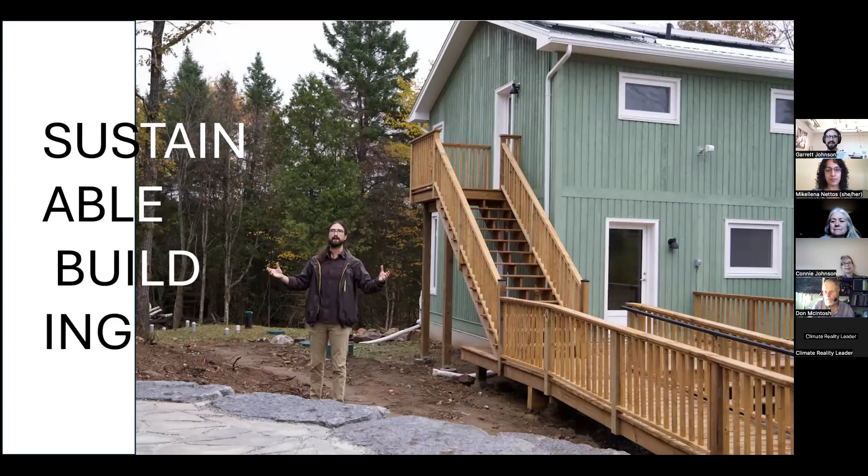So as a preamble, I'd like to just acknowledge that there are many issues in the building sector, and I'm going to talk about technologies and approaches that are needed to offset a lot of the negative effects of the built environment. But I was reminded recently after speaking at an event hosted by Plenty Canada and the Niagara Escarpment Biosphere Network that no amount of technology is going to fix the issue of environmental devastation that we're seeing, and probably more important will be to change our relationship to the land and to one another. And any technological solution will inevitably be a stopgap until the broader issues are healed. We can't design the Line. I don't know if anybody's seen that, but these mega projects claiming sustainability aren't the answer.

And I'd like to quote Dan Longboat, who spoke at that event I referenced before, who said that hurt people, and we've hurt ourselves and hurt the land, but in the process of healing the land, we can also attempt to heal ourselves. So that's just context for the rest of the presentation.

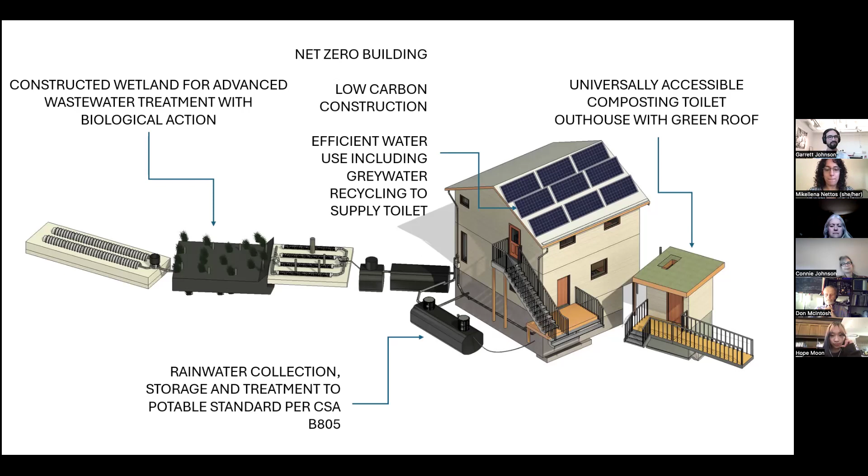So I'll start off with the rainwater harvesting system. You can see this is a below ground tank, 5,600 liters. And again, it supplies the whole building. So potable use, toilets, everything. And there's actually a standard now that allows you to have potable use officially, called the CSA B805. So if you're interested in doing this in your own projects, you can look that up or get your local builder or engineer to cite that standard, and building officials will take it a little bit more seriously.

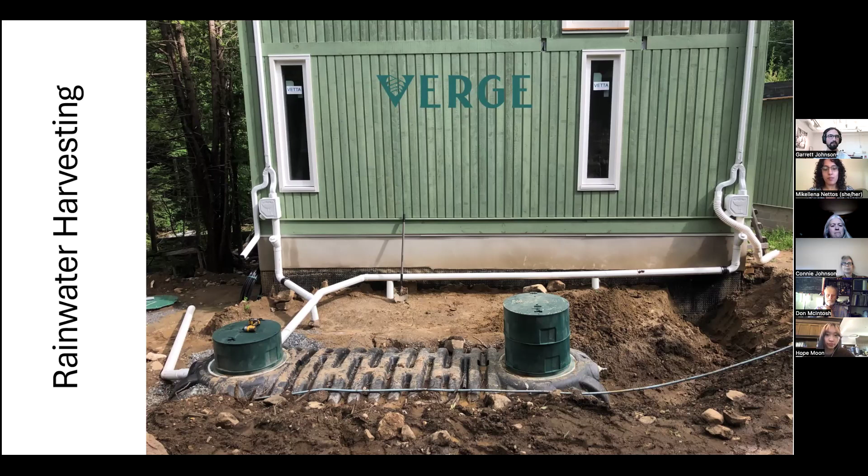I learned a lot about rainwater harvesting from Verge Permaculture. I highly recommend their rainwater harvesting course. These systems are great, not just for off-grid systems, but also in urban environments. They affect stormwater management on big systems, similar to how your single home solar panels can affect the larger energy grid. So there's a lag when stormwater reaches the sewers, and it helps out with municipal infrastructure.

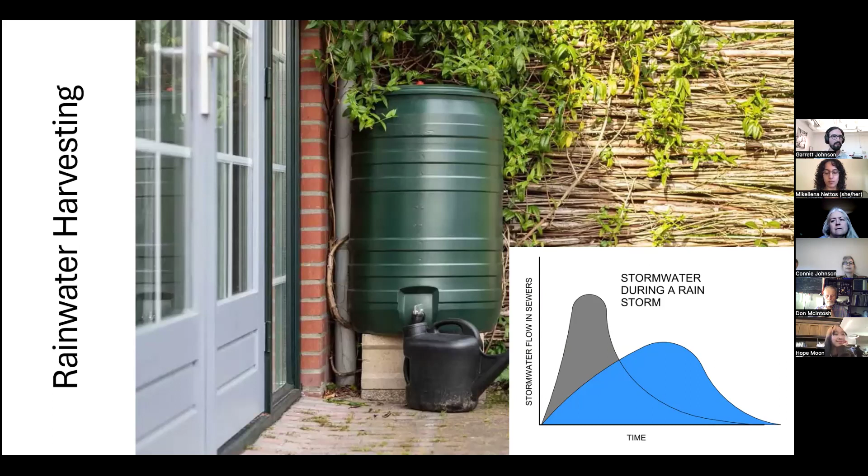And this is the gray water recycling unit we installed there. So it takes water from the showers, treats it, and then sends it to the toilets. And that can reduce your average home use by 30% and up to 90% for commercial buildings.

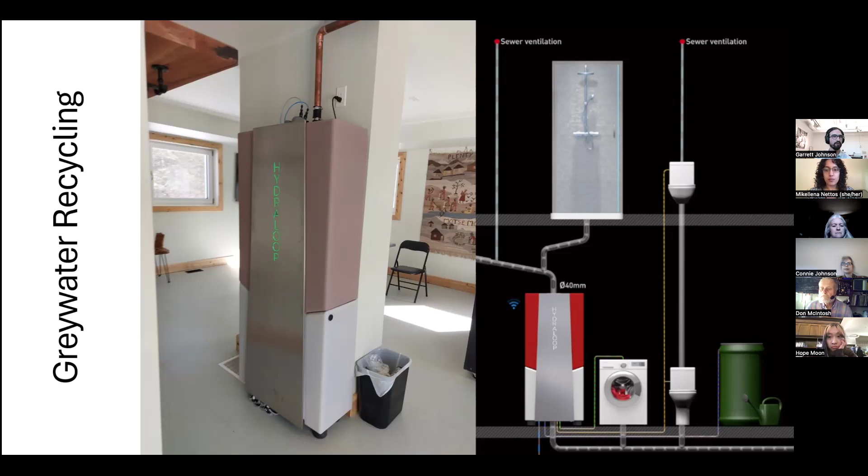And this, again, is a snapshot of that advanced wastewater treatment with the constructed wetlands. So water filters through sand and rock media where plants are rooted, and those biological activities take nutrients out of the water so they don't end up in groundwater. And I designed this system with Rivercourt Engineering.

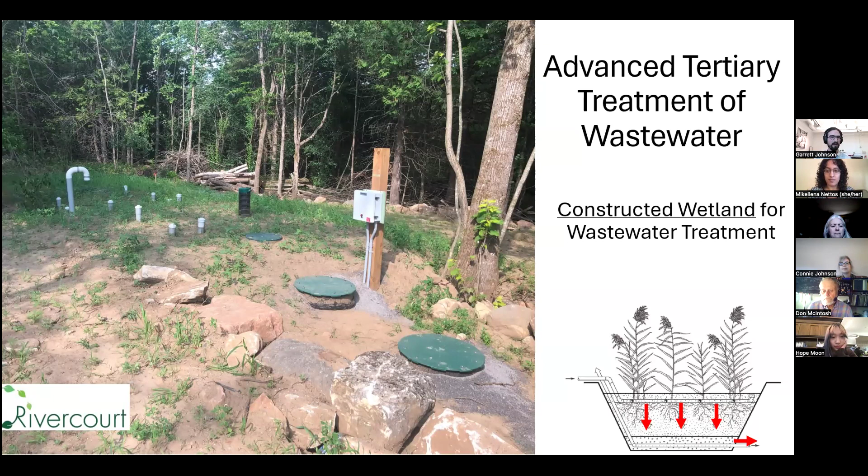And finally, we have the true and direct circularity. So this is a composting outhouse, very much inspired by the Humanure Handbook, which I highly recommend. It's a very great book. And this system is great because it's inexpensive and simple. A lot of the other systems, like the gray water recycling system, and even to some degree the constructed wetland, they're expensive, kind of complex, and sometimes they're more suited toward commercial and institutional situations. But you can also take that smaller approach and do something good on an affordable scale.

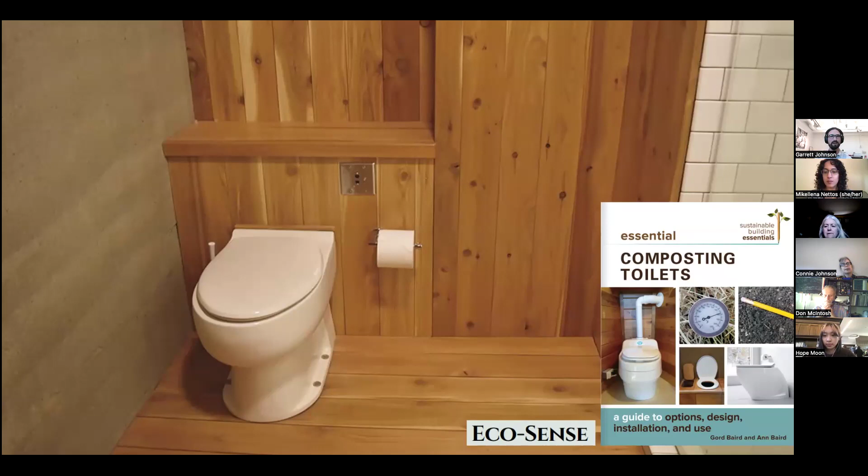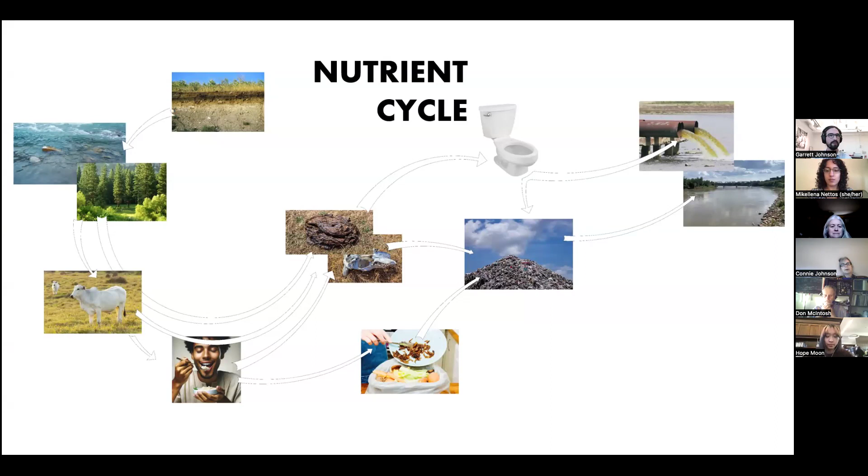And you can make it look nice inside. It doesn't necessarily have to be an outhouse. There's a lot of people that have these in their homes, and it doesn't have to look bad. And that helps out with the nutrient cycle. So it takes us from a situation where we're taking nutrients from the soil and essentially just dumping them into the water to something that's more of a natural cycle where we're taking nutrients from the soil, using them, and then putting them back into the soil.

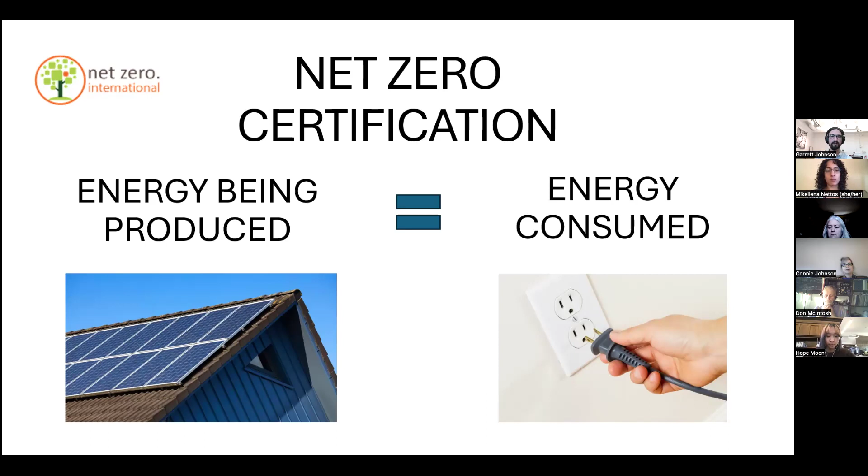The building at Plenty Canada was also net zero certified. So that means that the energy being produced on site equals the energy being consumed. And this past year, the building was actually producing more energy than it was consuming. And that's largely due to the insulation that was added and the windows. So we stripped off some very old siding that was kind of falling apart, added some low carbon wood fiber insulation outboard, and replaced all of the windows with triple pane windows.

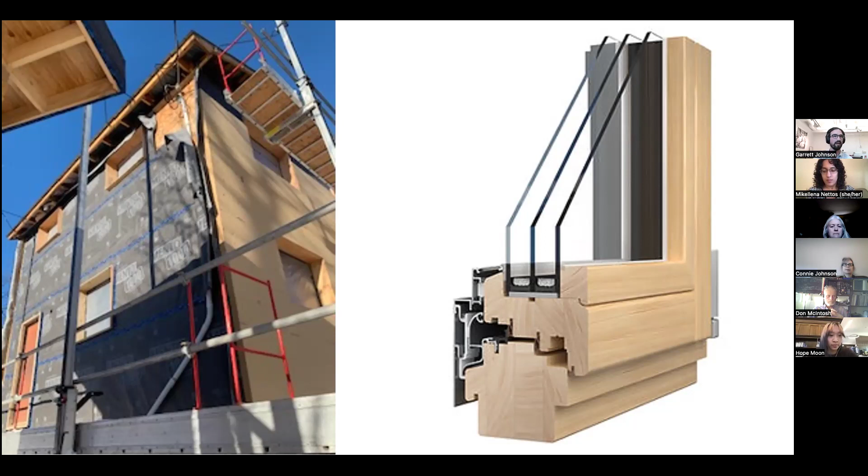And this is more of what I'm going to talk about for the rest of the presentation. My background is mainly in building construction, and a lot of the work that I've been doing recently has been around insulation and embodied carbon in the built environment, which I'll speak about shortly. So as everybody knows, there's a housing shortage in Canada, and people are talking about building homes more quickly. You know, the More Homes Built Faster plan in Ontario.

And this obviously has to be paired with building efficient houses. Most of Ontario is heated with natural gas, and the typical home ends up releasing about 4.5 tons of CO2 per household per year. So it's obviously very important to have that building envelope, the insulation around your building, be very efficient to reduce that number.

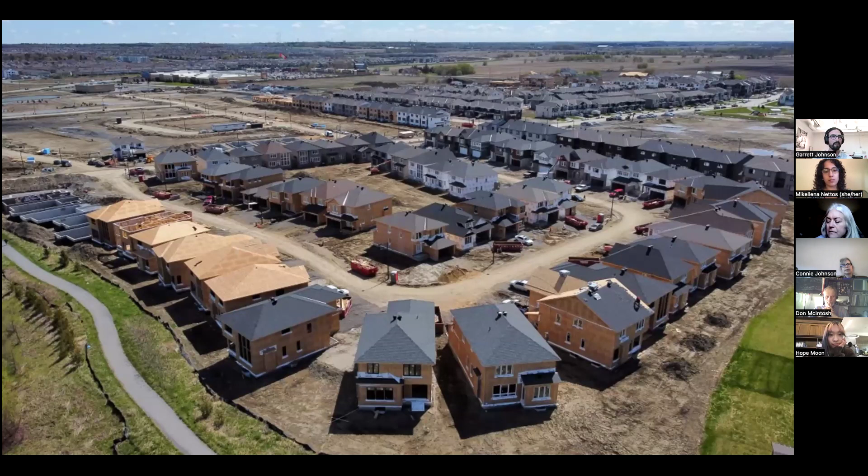But there's a similar situation with the impact of building homes. The materials that go into the house itself also have an impact, and the manufacturing processes, the raw materials extraction, all of that ends up having an impact on the environment. And that's what we call embodied carbon. So from raw material extraction, transportation, installation, demolition, end of life, that's all embodied carbon.

Whereas operational carbon is what the majority of the sustainable building industry has been focused on up until fairly recently. And that's just making sure you're not burning a lot of natural gas to heat your house. But it turns out that embodied carbon can actually have a huge effect on the overall environmental sustainability of your construction projects. And it can even outweigh that operational carbon.

And there was an embarrassing discovery recently where people started to realize that the well-meaning sustainable builders and people who commission them to build their houses can sometimes end up doing more harm than if they had just built a regular house, by trying to add all of that insulation to hit those really low operational carbon targets. Adding things like spray foam, particularly the pink hard rigid foam, XPS insulation, has a very high global warming impact. And you can actually end up doing more harm than if you had just built a regular house and even heated it with natural gas.

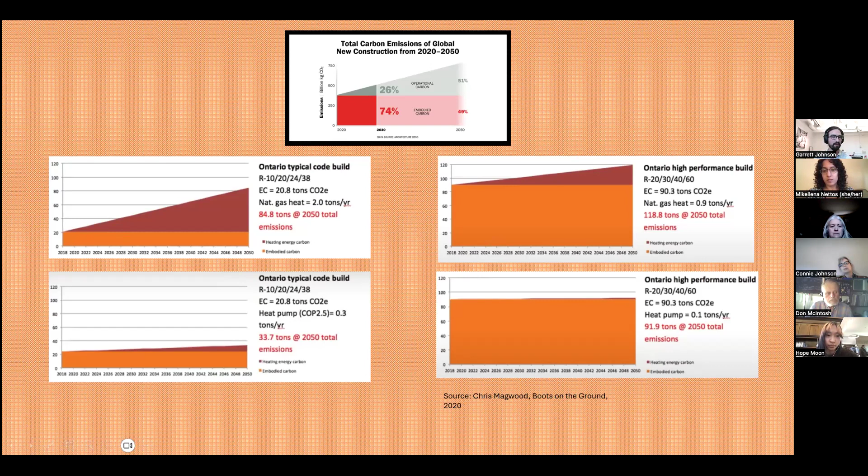Very surprising. But the good news is that it's possible to use different materials and still get a very efficient house, but have a very low embodied carbon. And this chart is from Chris Magwood's talk from Boots on the Ground in 2020, and he shows that even heating with natural gas, it's possible to have a very low carbon impact. And if you heat your house with a heat pump, have an efficient home, use those good materials, you can have a negative embodied carbon profile for the lifespan of your building.

So that means you're sequestering more carbon by building. You're actually doing something good for the environment. And that happens because plants are natural sequesterers of carbon, especially fast-growing plants like agricultural fibers. There's a lot of talk about carbon sequestration, building machines that are solar powered to capture carbon direct from the air. Plants are already doing this, and they're creating a material as they grow that we can use and incorporate into our environments. So taking those natural materials, processing them with renewable energy, you can actually have those negative embodied carbon profiles for the materials that you're putting into your building.

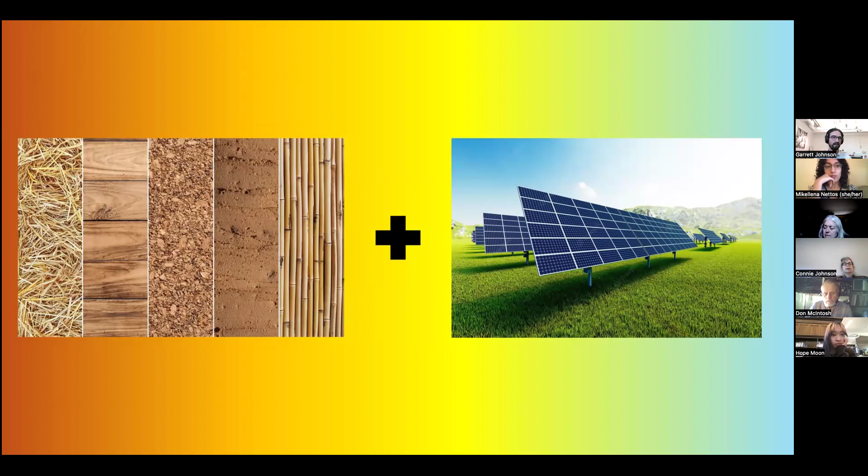You put them into your building and they stay there for as long as that building is standing. So it can stay for 100 years easily if you build right and take care of your place. And that's important because CO2 emissions have sort of a lag effect when they're emitted. Even if we stop emitting carbon now, we have all of these issues with the carbon that is already in the environment that's going to cause warming.

And to truly limit the effects of climate change, we need to not only hit net zero, but net negative carbon. So we need to be sequestering more carbon than we're producing as an entire society. And this could be a very useful, easy way to do that in the short term, to take carbon from the atmosphere and put it into our buildings.

And so I'm going to talk specifically about one aspect of a home's construction, that continuous insulation. So for those who don't know, it's now a requirement in most situations to have this layer of usually foam outside of your house's framing. And this is good for building efficiency. Continuous insulation doesn't have any thermal bridging.

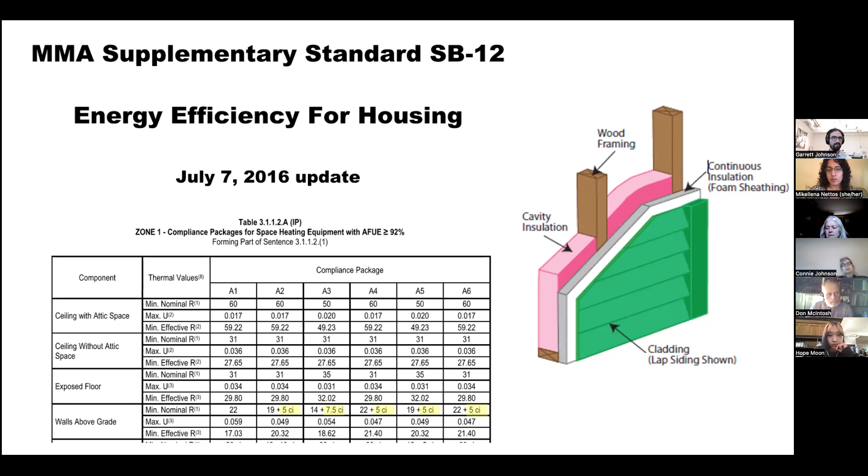And installing this in your home, you essentially can't install enough to justify the savings in energy that you get by having a more efficient house. So you have to choose your materials wisely. And these are the most common rigid insulations currently used today. Those are the big five.

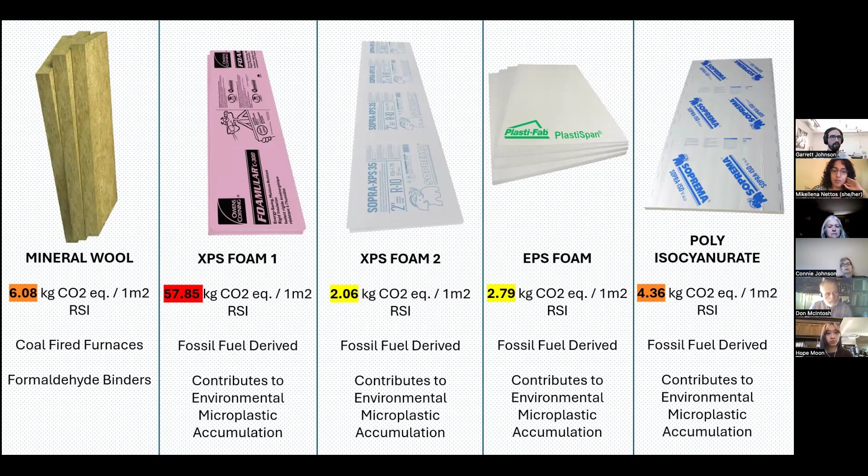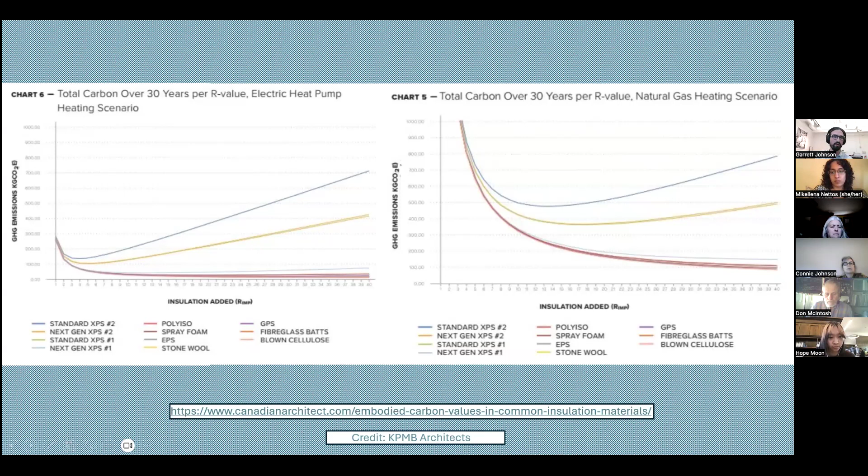And for different materials, they act differently. So the better materials, you see those emissions reducing the more R value you add to your house. So it's important to choose your materials in your building. And there are some existing products that are available, and right now they're pretty much exclusively made from wood fiber. So there's a company called Gutex from Europe, Sonoclimat from Quebec, and a new company, Timber HP, that's operating out of the United States.

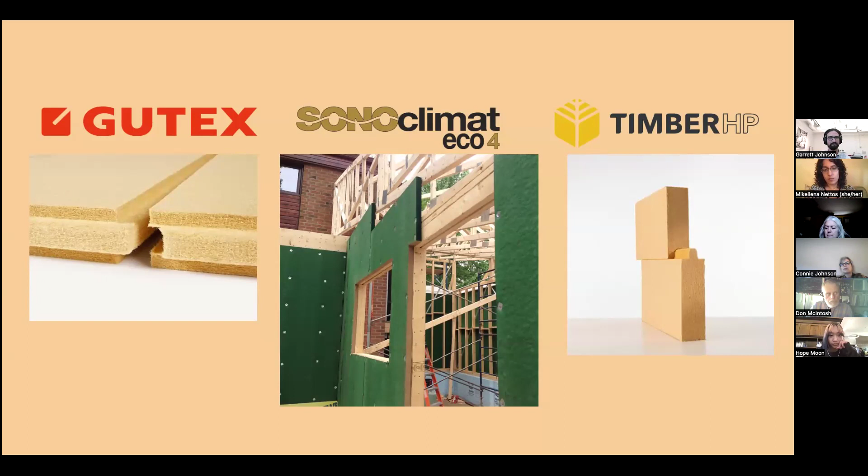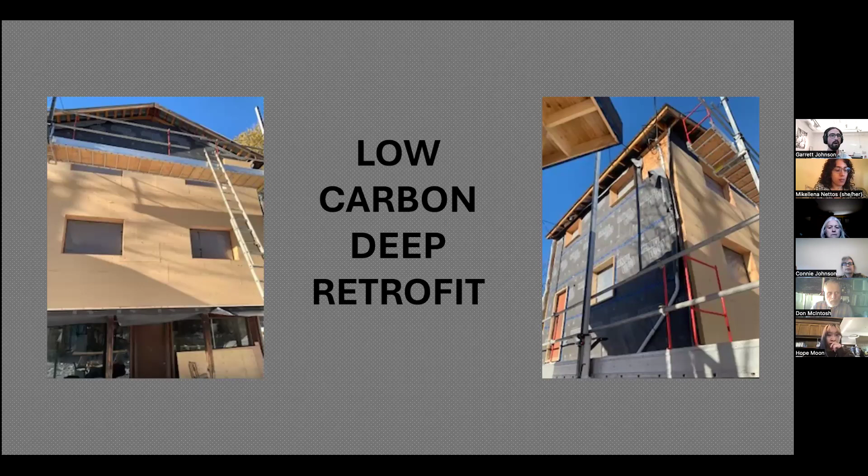And that's how we insulated the building at Plenty Canada. So we did a low carbon deep retrofit. So for people considering retrofitting their building to be more efficient, choose those materials. They're available. They're not significantly more expensive than the other products, and they'll actually do a positive thing for the environment. And that's how we can have a renovation that ends up being carbon negative. So that building is heated with a heat pump and has those natural carbon sequestering materials.

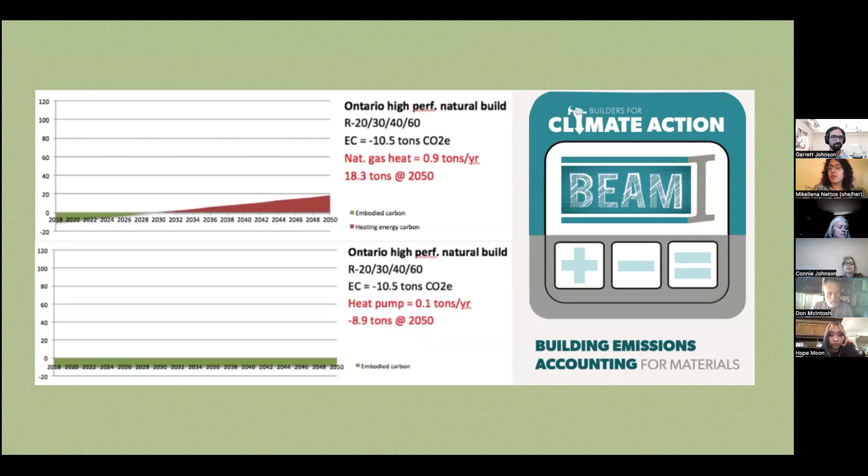But not to demonize forestry, but there are issues with the lumber industry, and a poorly managed forest is not necessarily carbon sequestering, and it can do harm to the environment. So there's deforestation, habitat loss, carbon emissions from decaying roots and the brush that they clear and leave on the land. And then there's all of the transportation emissions and infrastructure that goes in from taking the wood from these forests that are further and further away as we harvest all of the forest habitat nearby population centers.

Transportation increases all the time, and we're increasing the use of wood that we're needing with things like mass timber, which is great. It's a great alternative to concrete and things like that for industrial buildings, institutional buildings, commercial buildings. But there are maybe better choices and better paths to go down for smaller scale situations.

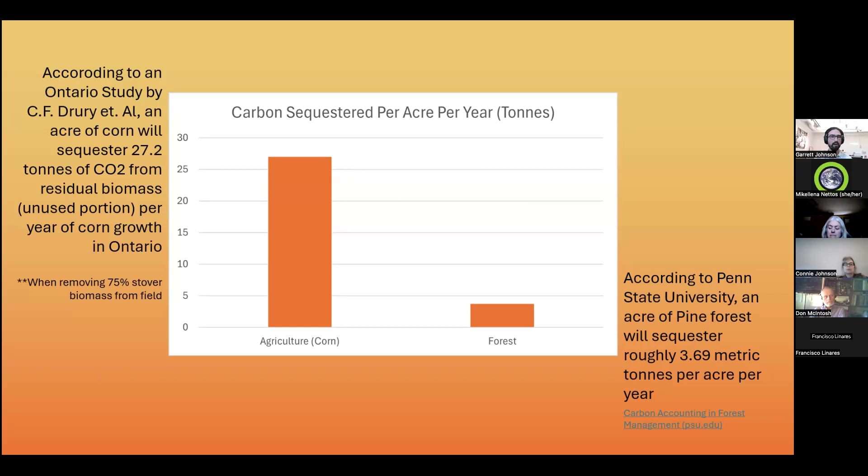And there are methods already existing that use this concept. So straw bale construction, it's been around for over 100 years and is seeing a revival recently. You can make very modern, beautiful looking homes that you would never guess were made from straw bales.

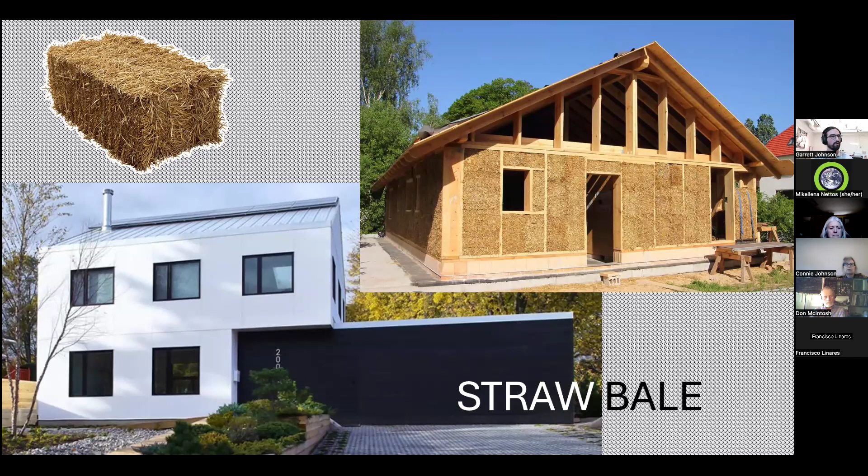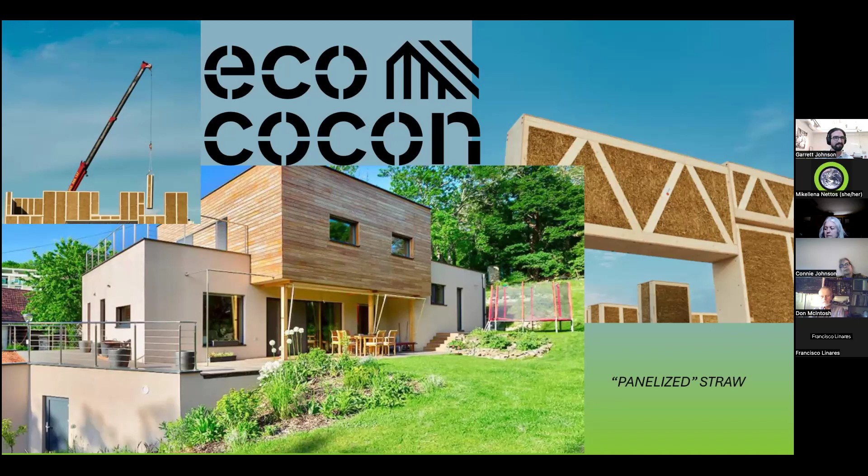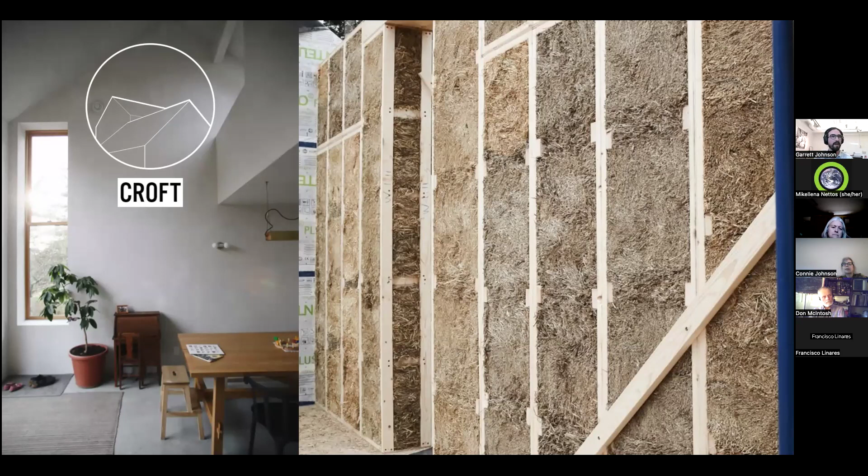And there's even a growing community of builders making prefabricated straw bale wall assemblies. So Ecococon from Europe is one of the big players in that field right now, as well as Croft from the United States. So they essentially pack straw bales or straw from agricultural waste products, and they pack it into your wall, and that acts as insulation. They can prefabricate it offsite and then ship it over and drop it in with a crane.

There's also hempcrete construction or hemp lime construction, which was recently added as an appendix in the International Residential Code. So for this building method, you take hemp hurd, the inner hard core of the hemp plant, after you've stripped away the fibers on the outside, and you mix it with lime, and then you create this sticky mixture and you pack it into forms, and you can layer it up and get these kind of beautiful striations there, or you can turn it into bricks and ship it to site and build up like that.

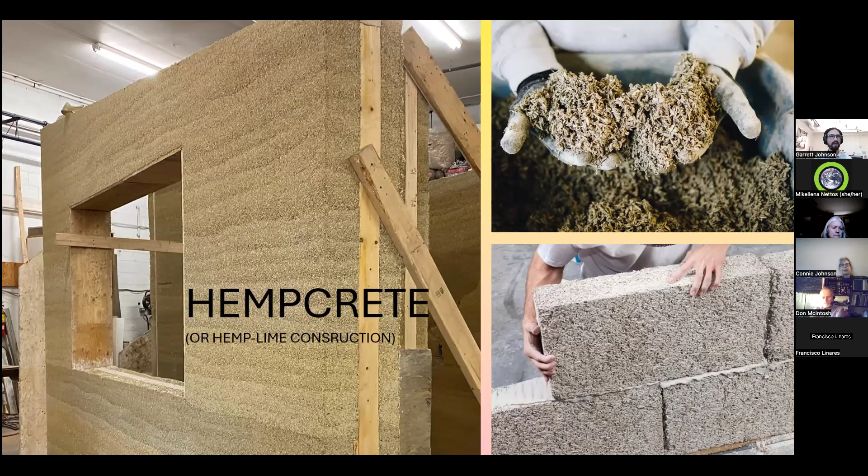And again, you can make any design that you'd like with this. They don't need to be limited to something that looks like it was home built, or anything like that. They can end up becoming mainstream. They can become normalized.

And beyond those other building techniques, which I think might often end up staying as niche systems, because the building industry is made up of workers and people who have skills and training, and you have to learn new skills and develop new knowledge to implement some of those other techniques. And again, those are great and they're necessary, but we can also take products that we know how to use already, like fluffy batt insulation, like that pink fiberglass you see in your walls, and we can substitute it with natural materials.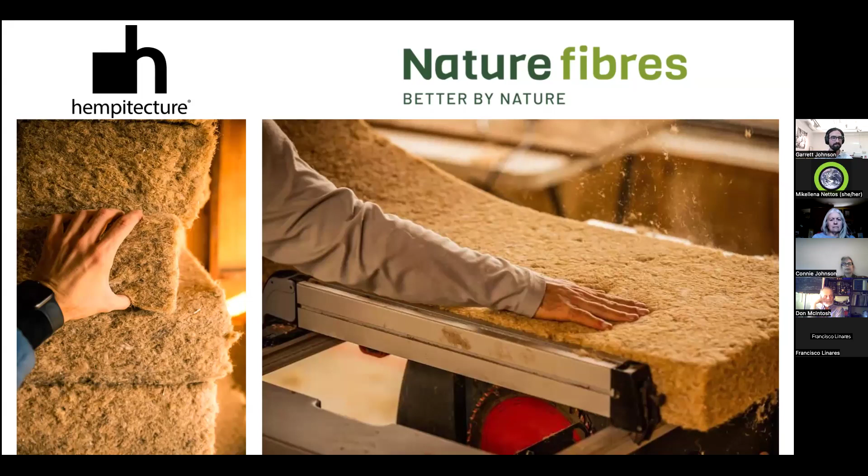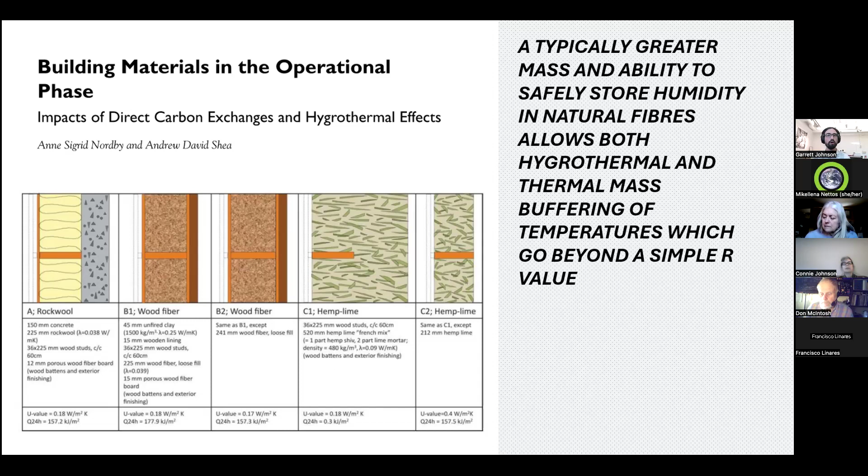And another benefit beyond carbon sequestration for natural materials being used as insulation is that they typically have a greater mass and ability to safely store humidity in those fibers, which has a benefit that goes beyond the typical simple R value of a wall. And that's because with the heavier mass, the materials in the wall itself have to heat up before it radiates heat inside and heats your building. And it has to cool down before that coldness is felt inside your building.

So the greater the thermal mass and specific heat capacity of a material, the longer it will take to heat up and cool down, and therefore the longer it'll take for you to notice those outdoor changes. That means more stable temperatures inside your house, which is great for shoulder seasons like the spring and fall, where there's a swing throughout the day and night cycle between heating and cooling.

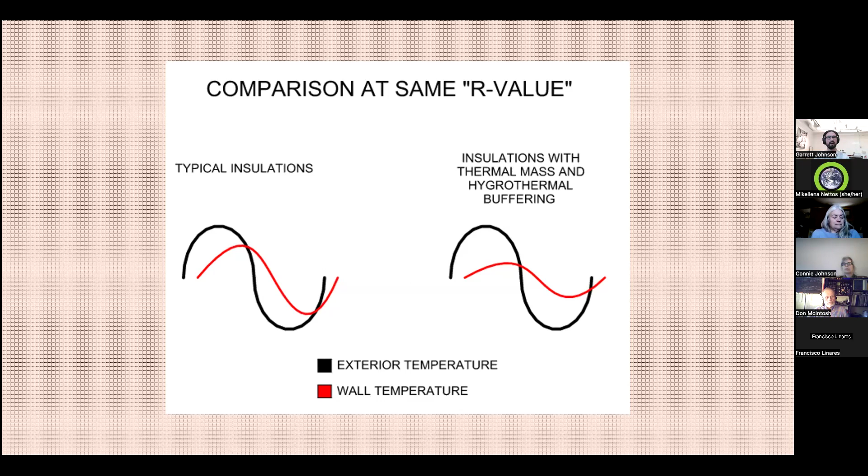And the humidity absorption acts in a similar way. So if there's humidity within a material and it starts to heat up, it takes some of that energy to change the water's phase from a liquid to a gas. And that change happens without an increase in the material's temperature. So it kind of acts in that same way to stabilize temperatures.

But where is the non-toxic, carbon negative, rigid insulation from agricultural fiber? So we saw that hemp batt insulation, but there's not really an equivalent for rigid insulation to replace those foams that can be very harmful. And that's where my recent work has been focused.

So in a project that I took on while I was in school at Mohawk College with IdeaWorks, I was sponsored by Evolve Builders Group, which is the company I work for right now, and the Canadian Bio Clean Tech Applied Research Network, CBARN. They supplied some funding and lab space for me to play around with fibers and adhesives.

And originally I was very focused on hemp fiber because that insulation already exists, and it was kind of the natural inspiration. But after a conversation with Chris Magwood, who I hired as a consultant for the project, he talked about how hemp is not really grown in Ontario at the moment.

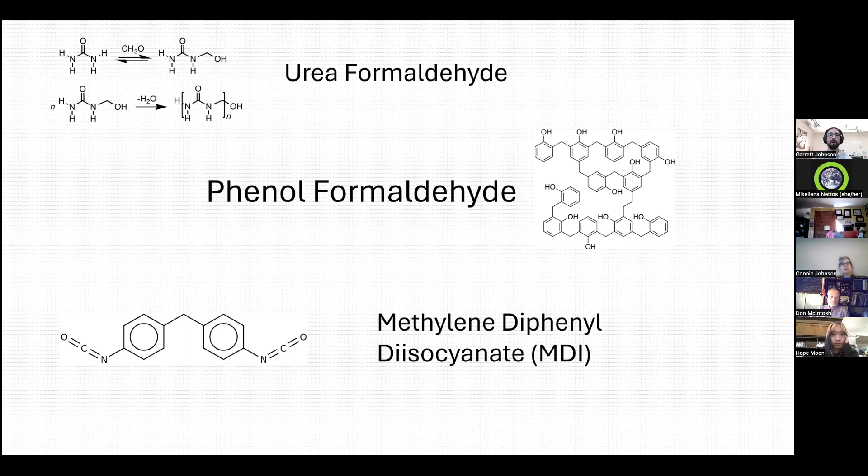So the fibers were sorted out, but in the construction industry, we use a lot of really nasty adhesives. And these are the big ones that are used in pretty much every engineered building product, from plywood, particle board, insulation, like fiberglass insulation or the rock wool insulation. They're using formaldehyde adhesives with petrochemical origins, and they're toxic, or at least the base constituents are. And I really wanted to avoid these materials going into what I was developing. So that was a big part of the project.

I did a lot of research, hundreds of experiments trying to create an adhesive from lignin, which is the glue that holds together plant cells. So as I said before, in every plant, there's lignin and cellulose, and they work together to create a plant. And you can extract that glue and turn it back into something that's like glue. And eventually I hit a successful formulation, waterproof, non-toxic, and bio-based. And this was the resulting sample.

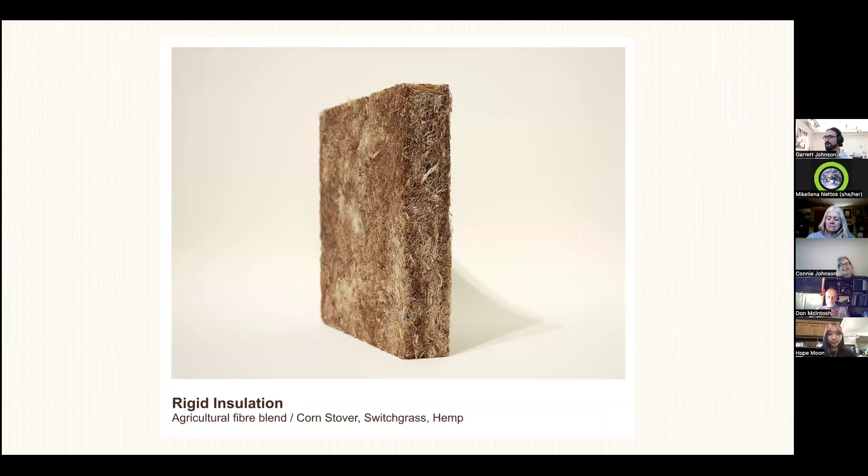And we were also interested in creating something to replace OSB, inspired by this company called Plantd, which is creating OSB from elephant grass. So that's another perennial plant. And this company has recently been awarded design competition awards, and they're getting a lot of investment to produce their materials, which is amazing. Unfortunately, it's not available in Canada, and I don't think it's even available countrywide in the States. So we were trying to come up with a similar solution here.

And we produced some samples. So OSB samples from hemp hurd, that hard inner core. It's very similar to wood and those chips of wood that make up particle board and OSB, the oriented strand board, wafer board that a lot of houses use outside of the studs.

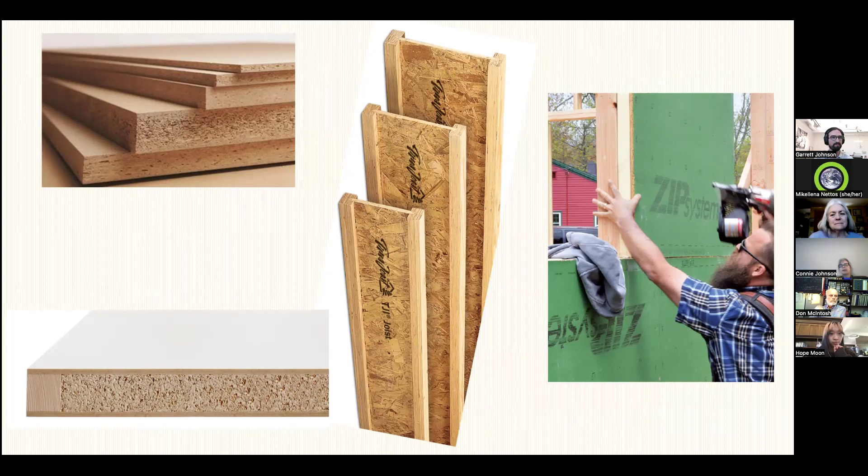And I suppose Janet asked me to put out an ask to the community. So if there are any IP lawyers in the audience that want to help navigate patent processes, we're in that process right now, or grant writers who know about non-dilutive funding, or people who just want to get involved in

the green building. I encourage you to build with your local sustainable builder, seek those alternative materials, think about your consumption, think about where your materials come from and where they go after you use them. And you can get involved in the industry. Look up videos of straw bale, hempcrete. You can change your career path if you're ever thinking about it. I did it later in life, and I'm very happy that I did.

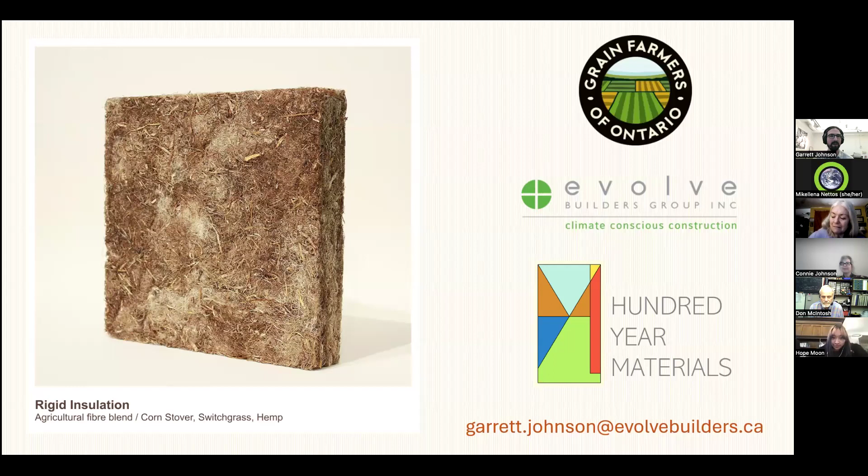That's super exciting. First of all, congratulations. Thank you. But is the idea that you would then be a supplier for different building contracts and stuff like that? Yeah, exactly. Initially we would be producing to sell in small quantities to contractors and different builders around the Ontario region. Well, amazing. That's such a beautiful partnership. I wish I knew someone who was building a house so I could hook you up. Totally. It'll be a few months or a year yet before we're able to sell, but soon enough.

So I'm curious, Garrett, someone will find this video and say, I've been doing renos of homes using certain types of materials, and I'm really looking forward to finding a place where I can learn about new materials and how to use them. Are there YouTube videos? Is there a website? Maybe that's what your company is going to have. I have a room to do in my home, a retrofit, and every time I've always gone to the latest materials to get maximum R value. But I don't want to use toxic chemicals anymore.